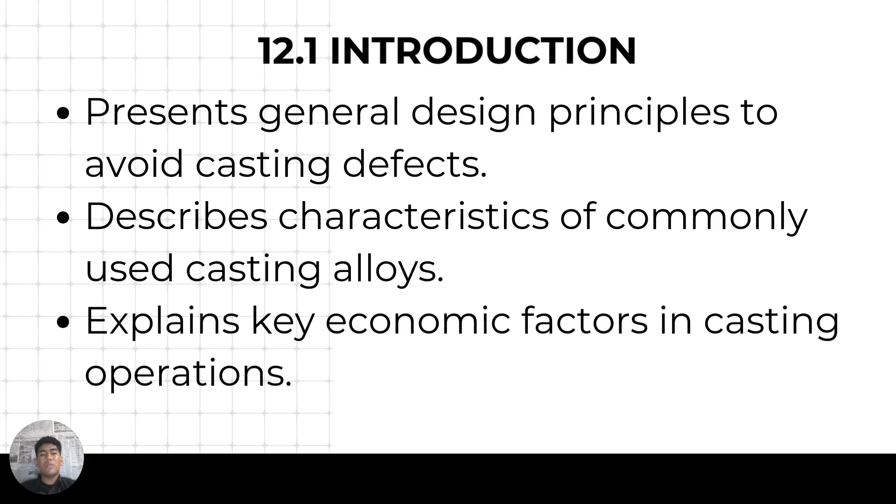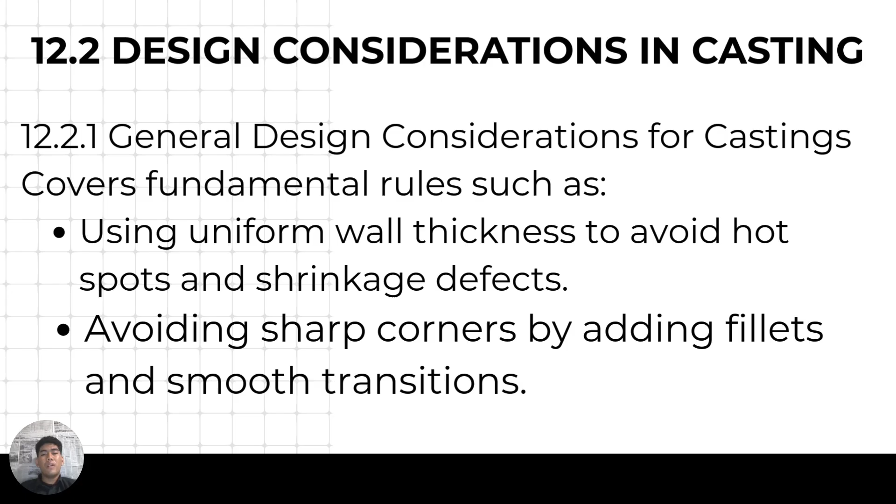Design considerations in casting. General design considerations for casting cover fundamental rules such as using uniform wall thickness to avoid hot spots and shrinkage defects, avoiding sharp corners by adding fillets and smooth transitions, choosing suitable draft angles for pattern removal, and proper placement of parting lines, gates, and risers to ensure smooth metal flow and directional solidification.

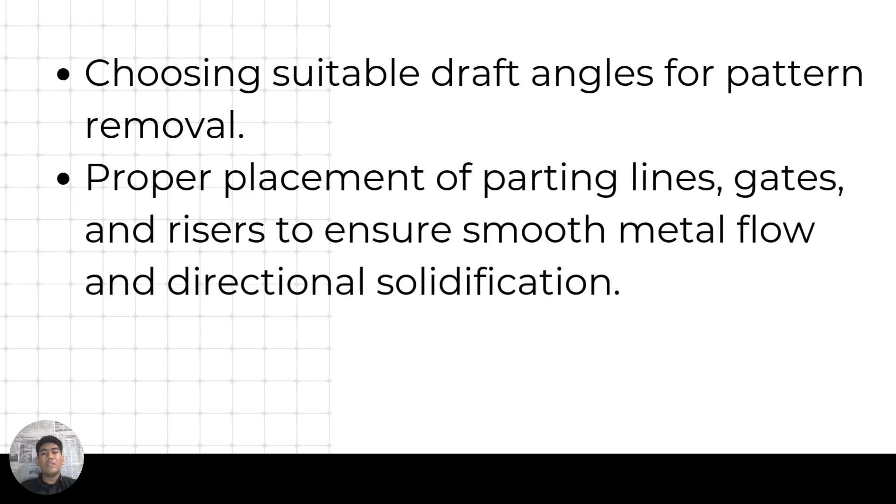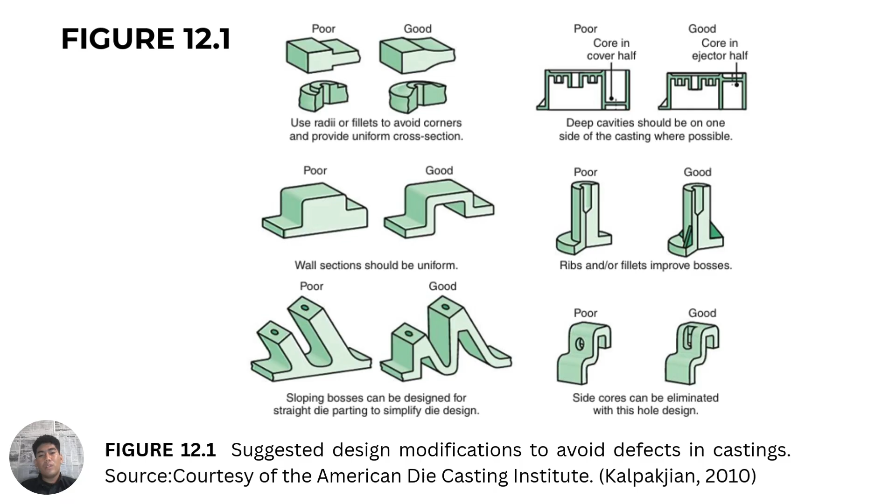Figure 12.1 suggests design modifications to avoid defects in casting. Use radii or fillets, avoid corners, and provide uniform cross sections. Deep cavities should be on one side of the casting where possible. Wall sections should be uniform. Ribs and/or fillets improve bosses. Sloping bosses can be designed for straight die parting to simplify die design. Side cores can be eliminated with this hole design.

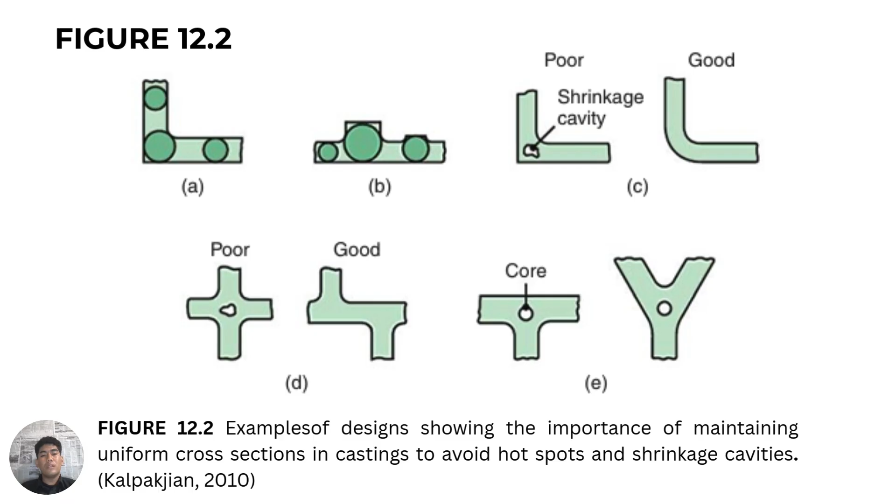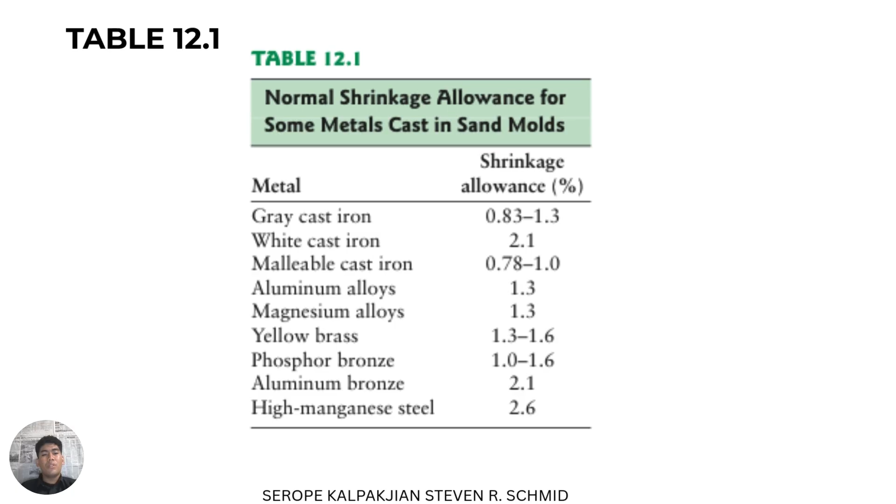Figure 12.2, an example of design showing the importance of maintaining uniform cross-sections in casting to avoid hot spots and shrinkage cavities. Table 12.1, normal shrinkage allowance for some metals cast in sand molds. Metals: gray cast iron, white cast iron, malleable cast iron, aluminum alloys, magnesium alloys, yellow brass, phosphor bronze, aluminum bronze, manganese steel.

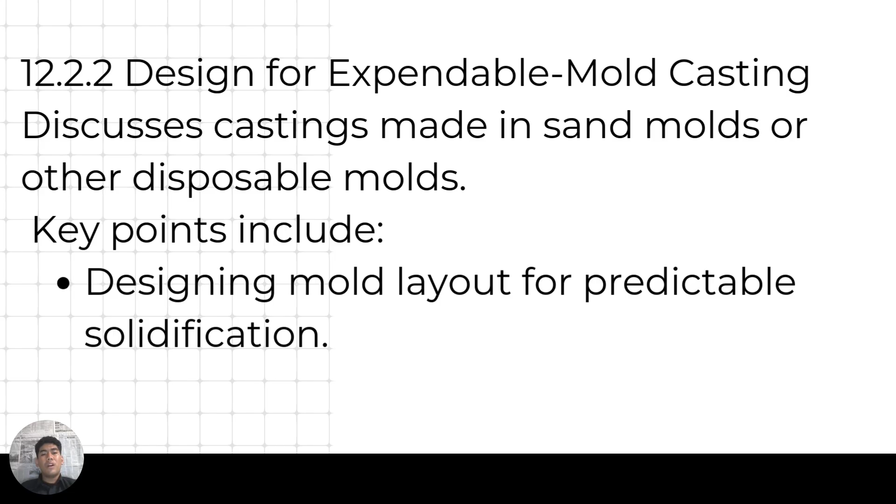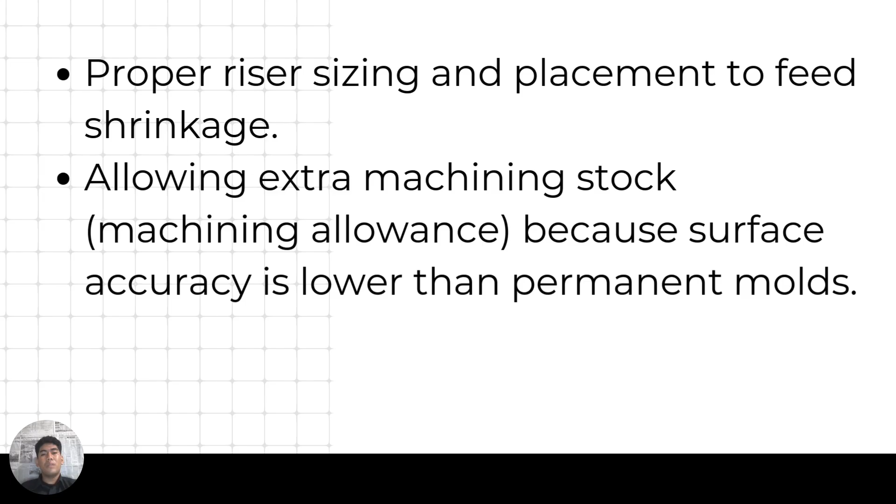Design for expendable mold casting discusses castings made in sand molds or other disposable molds. Key points include designing the mold layout for predictable solidification, proper riser sizing and placement to feed shrinkage, and allowing extra machining allowance because surface accuracy is lower than permanent molds.

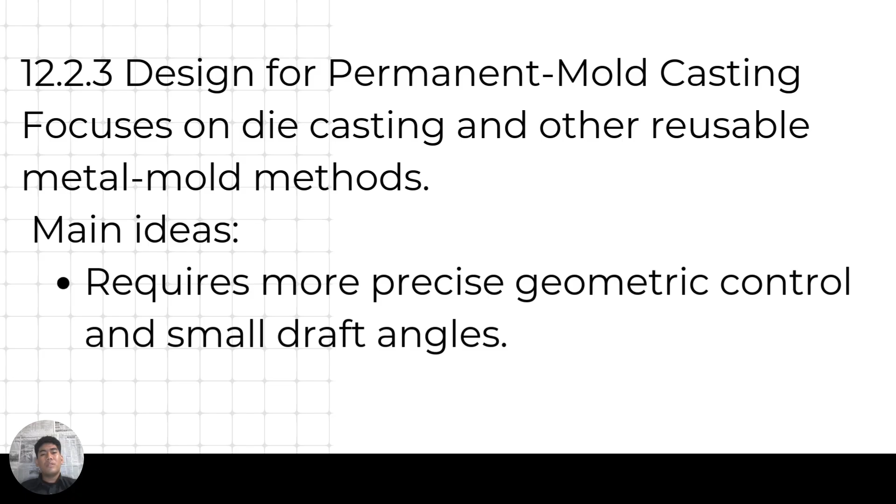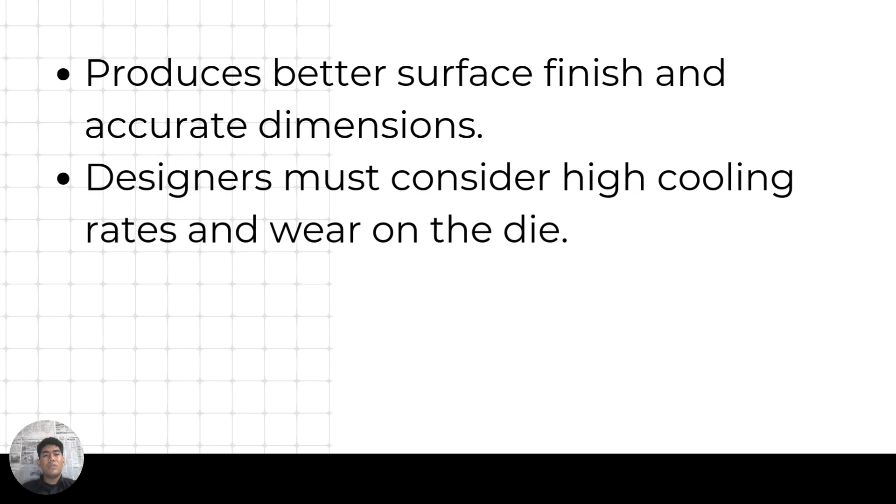Design for permanent mold casting focuses on die casting and other reusable metal mold methods. Main ideas: it requires more precise geometric control and small draft angles. Produces better surface finish and accurate dimensions. Designers must consider high cooling rates and wear on the die.

Example 12.1, illustration of poor and good casting design. Several examples of poor and good design in permanent mold and die casting are shown in Figure 12.3. The significant differences in design are outlined here. For example, A: the lower portion of the design on the left has a thin wall with no apparent function. This location of the part is thus susceptible to high forces or impact. The good design eliminates this problem and also simplifies die and mold manufacturing.

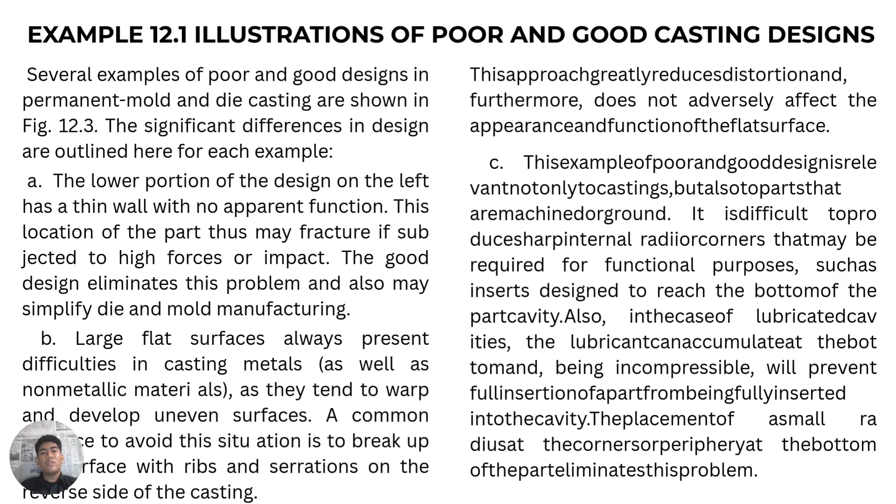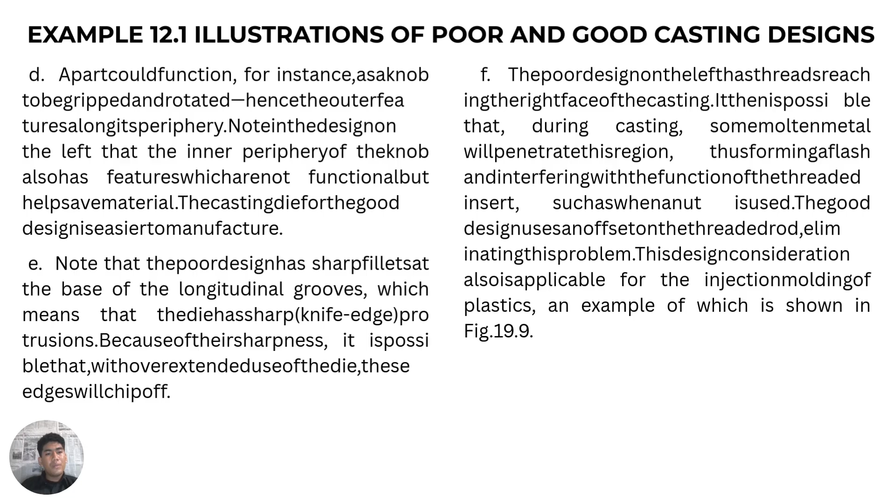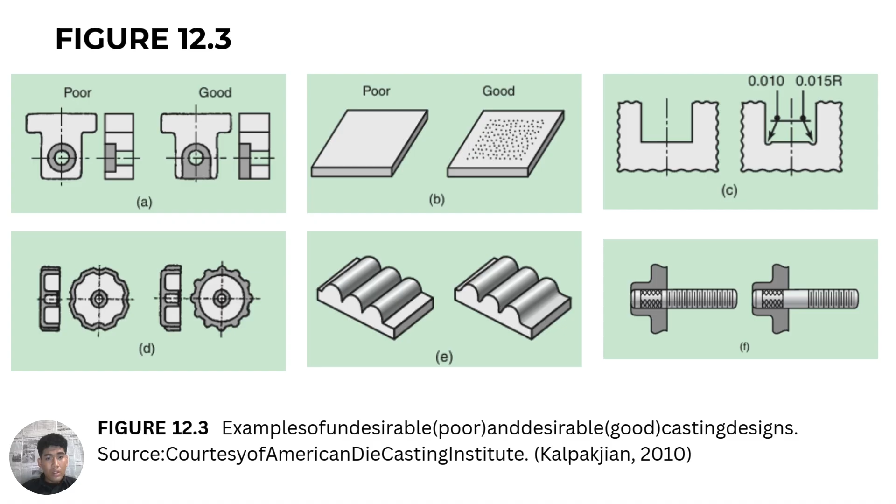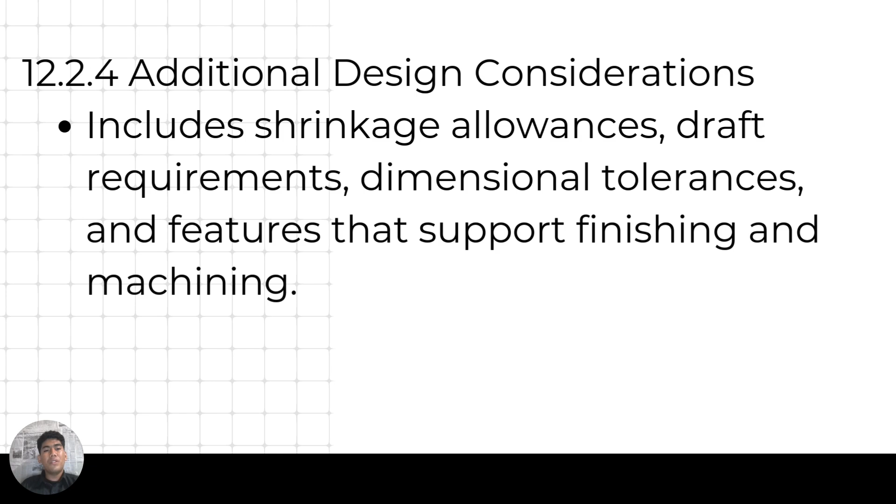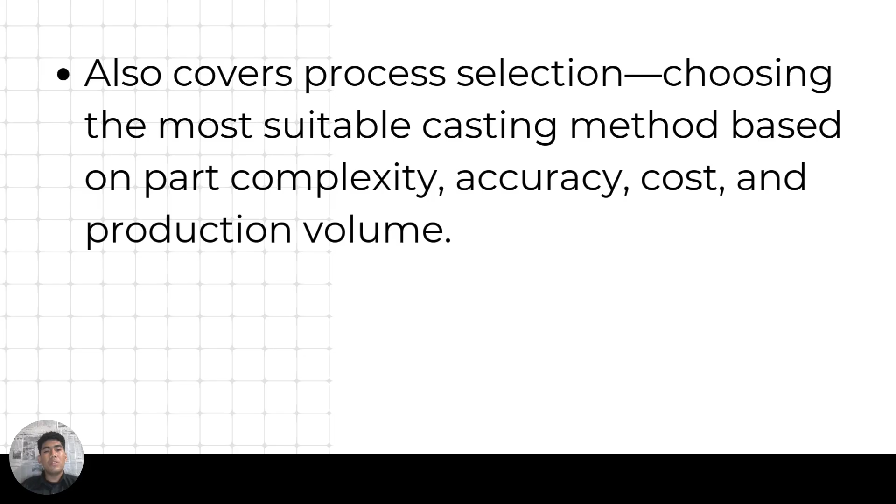Additional design considerations include shrinkage allowance, draft requirements, dimensional tolerance, and features that support finishing and machining. It also covers process selection, choosing the most suitable casting method based on part complexity, accuracy, cost, and production volume.

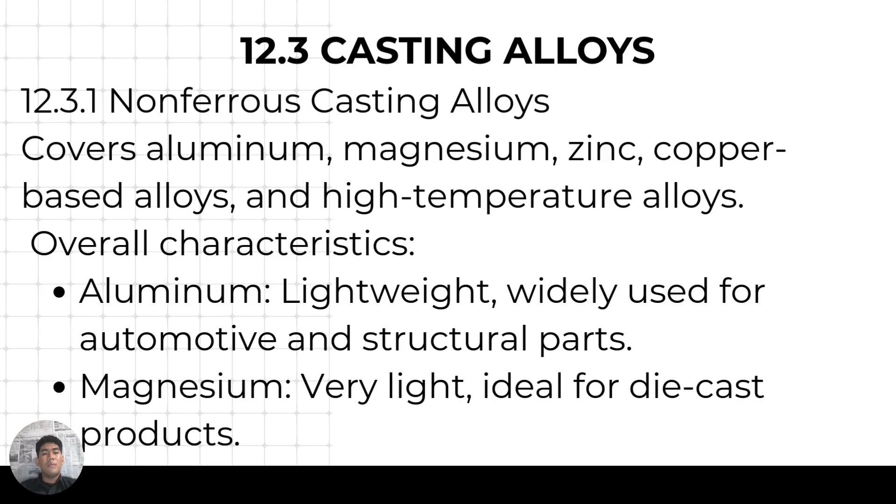Casting alloys. Non-ferrous casting alloys cover aluminum, magnesium, zinc, copper-based alloys, and high temperature alloys. Overall characteristics: aluminum, light, widely used for automotive and structural parts. Magnesium, very light, ideal for die-cast products. Zinc, excellent fluidity, perfect for small, precise components. Copper alloys, corrosion resistant, used in valves and plumbing. Tin or lead alloys, used for bearings, though lead use is limited. Superalloys, used for high temperature applications like turbine parts.

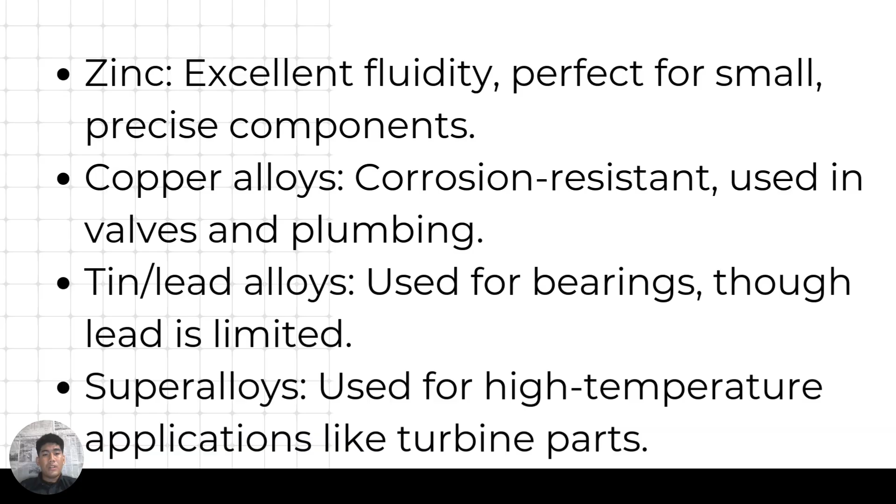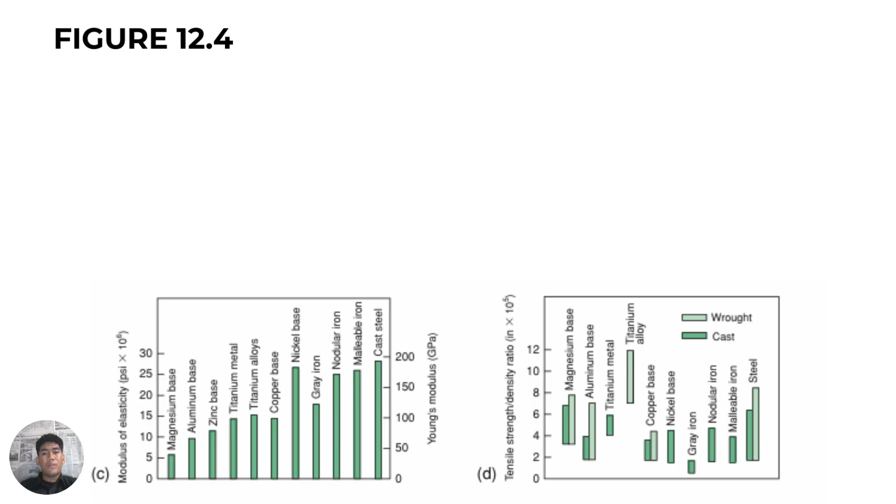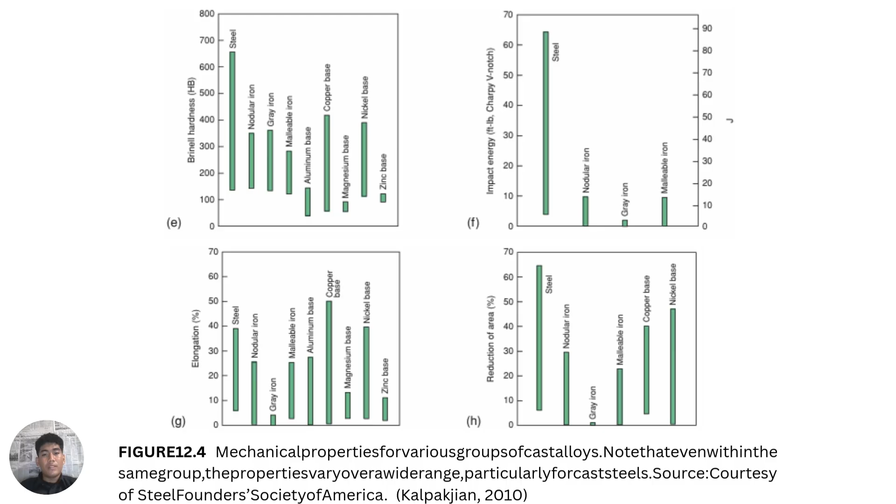Figure 12.4, mechanical properties of various groups of cast alloys. Note that even within the same group, the properties vary, particularly for cast steels. Table 12.2, typical applications for castings and casting characteristics. Types of alloys: aluminum, copper, ductile iron, gray iron, magnesium, malleable iron, nickel, steels, and zinc.

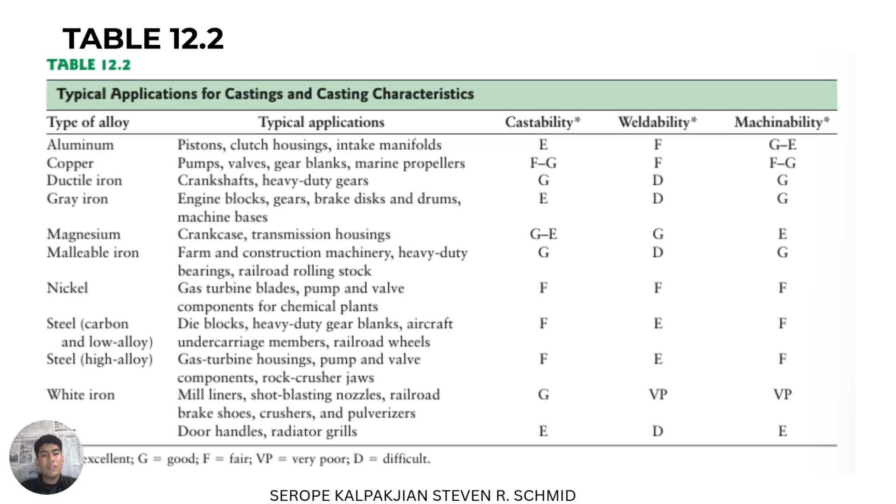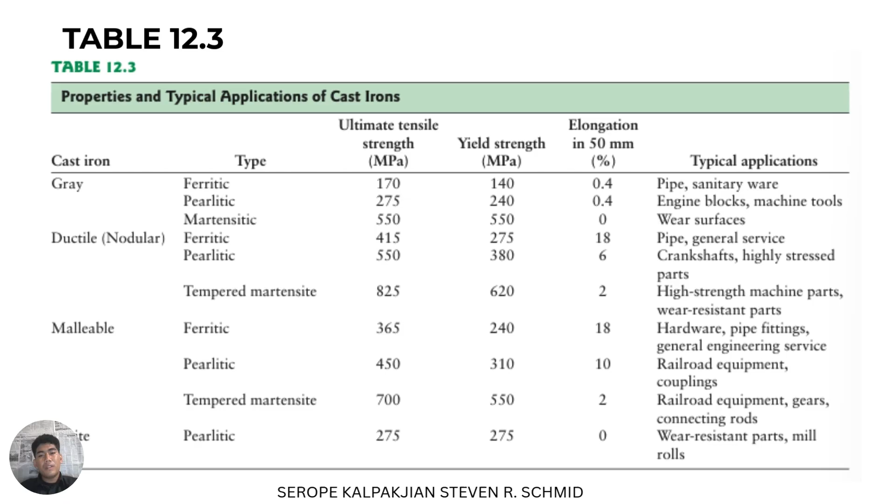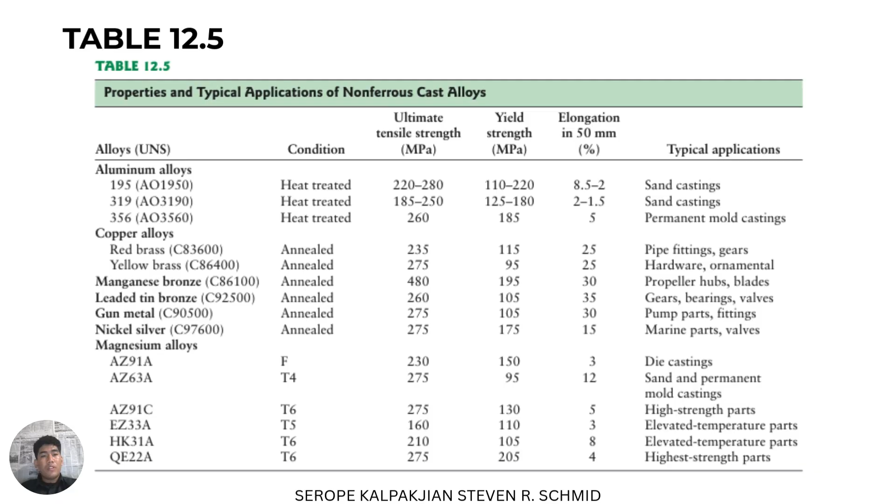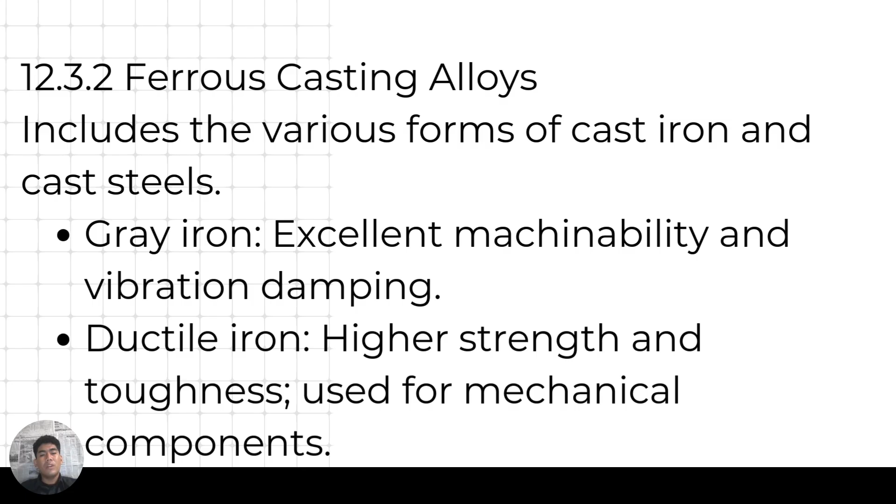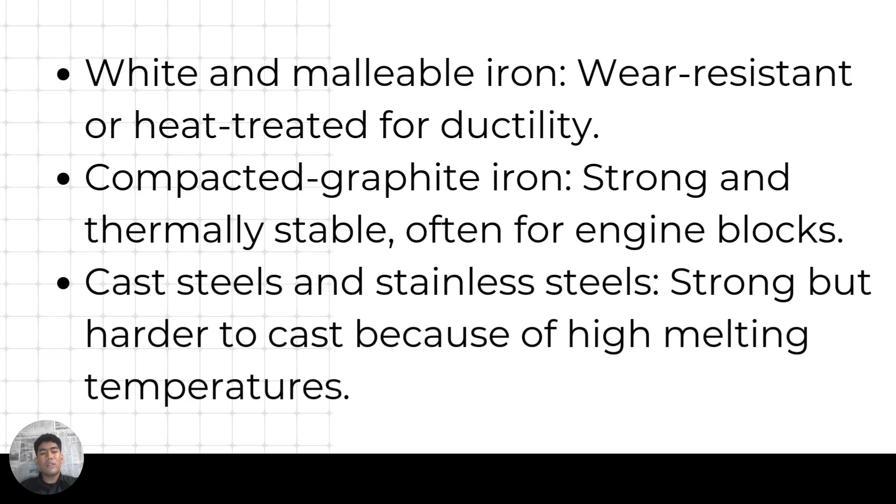Ferrous casting alloys include the various forms of cast iron and cast steels. Gray iron, excellent machinability and vibration damping. Ductile iron, higher strength and toughness, used for mechanical components. White and malleable iron, wear resistant or heat treated for ductility. Compacted graphite iron, strong and thermally stable, often for engine blocks. Cast steel and stainless steel, strong but harder to cast because of high melting temperatures.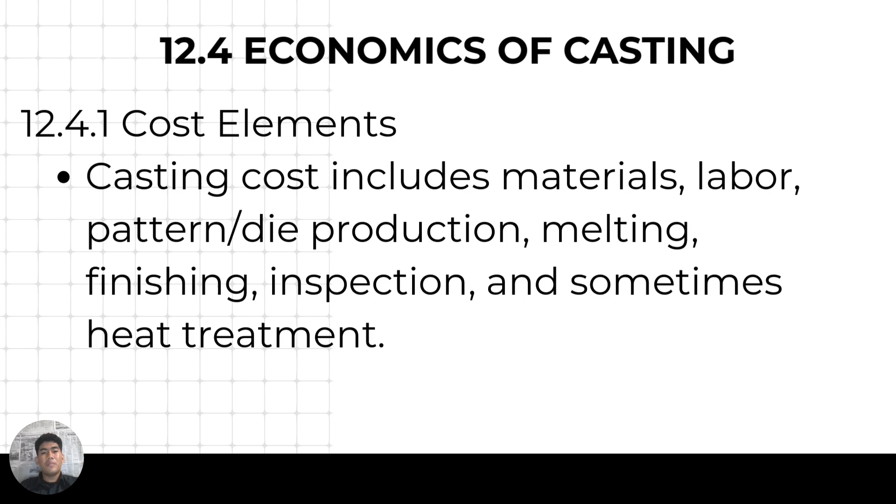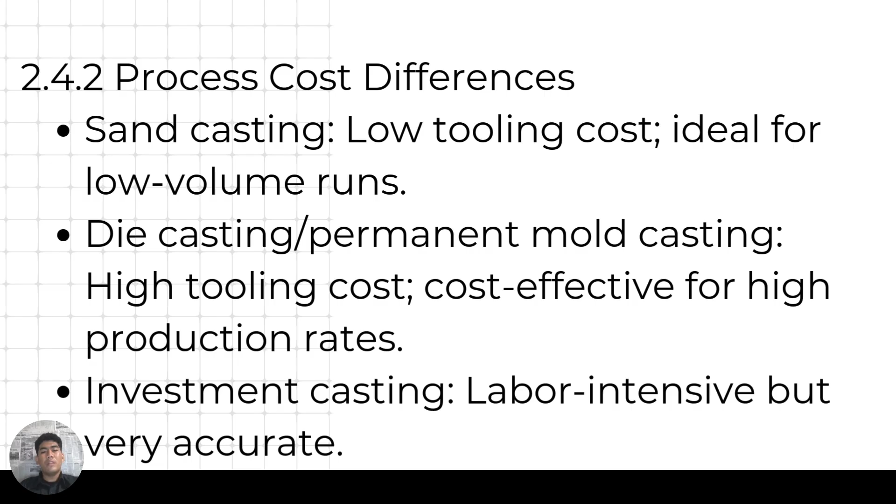Economics of casting. Cost elements: casting cost includes material, labor, pattern or die production, melting, finishing, inspection, and sometimes heat treatment. Process cost differences: sand casting, low tooling cost, ideal for low volume runs. Die casting or permanent mold casting, high tooling cost, cost effective for high production rates. Investment casting, labor intensive but very accurate.

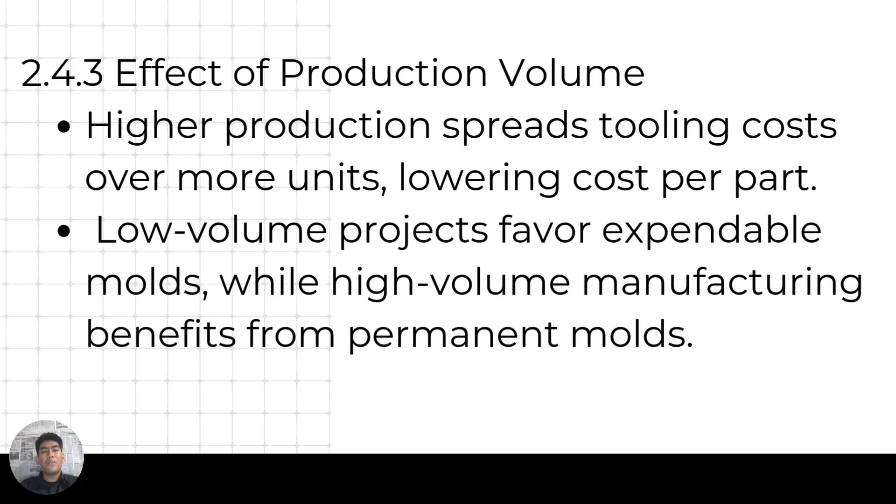Effect of production volume: higher production spreads tooling costs over more units, lowering cost per part. Low volume projects use expendable molds, while high volume manufacturing benefits from permanent molds. Table 12.6, general cost characteristics of casting processes.

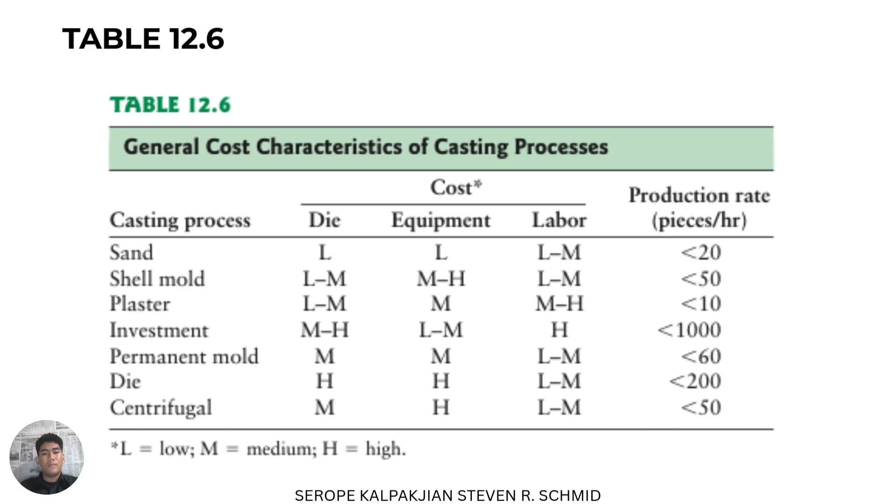Summary. Chapter 12 teaches us how proper design improves casting quality, how alloy selection affects performance, and how economic considerations guide the choice of casting process. Understanding these aspects allows engineers to create better, more efficient, and cost-effective cast products.